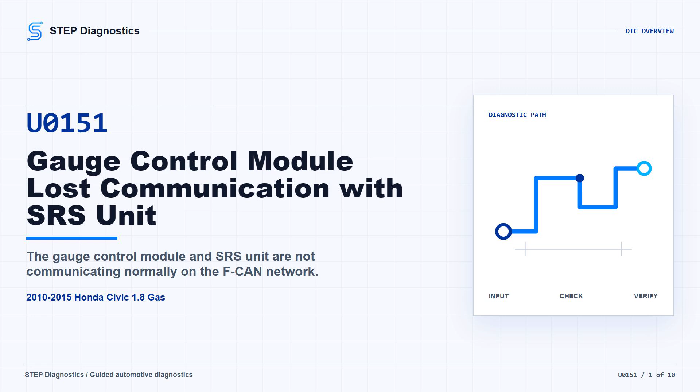On this 2010 to 2015 Honda Civic with the 1.8 gas engine, U0151 means the gauge control module has lost communication with the SRS unit on the FCAN side. In plain terms, the cluster and the airbag control unit may not be talking the way they should.

The vehicle may show warning indicators, communication-related scan tool behavior, or an intermittent concern. The broad possible fault areas are the FCAN wiring between the two modules, loose or poor connector contact, or the gauge control module side of the circuit.

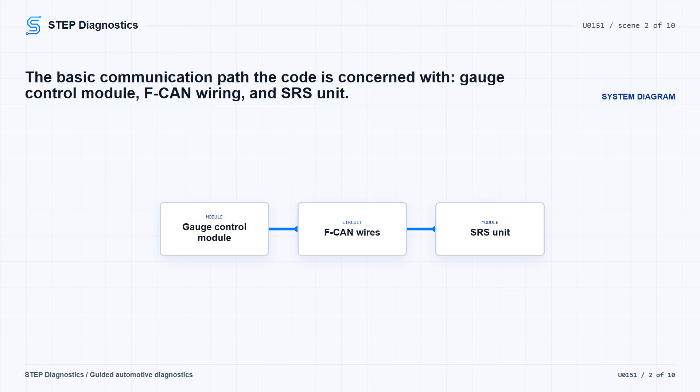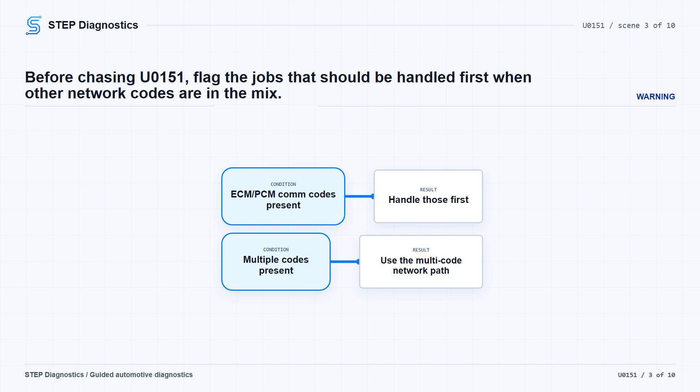Before you focus on U0151, if there are any loss of communication codes for the ECM or PCM, handle those first. And if you are dealing with multiple codes at the same time, work through the multiple code network diagnosis before narrowing this one down.

Start by verifying that U0151 is active after a clean reset. Clear the DTCs with the HDS. Turn the ignition switch to lock, position 0, and then back to on, position II. Wait for at least 6 seconds, then check for DTCs again with the HDS.

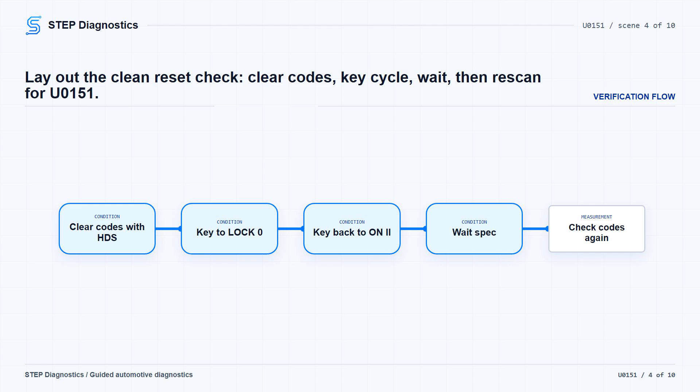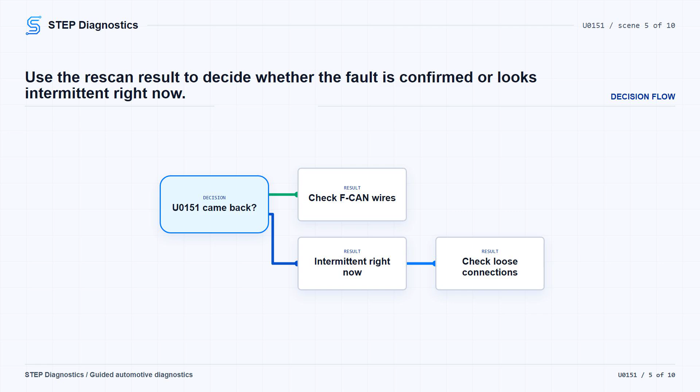If U0151 comes back, continue to the FCAN wire check. If U0151 does not come back, treat it as an intermittent failure. The system is okay at this time, so check for loose or poor connections instead of forcing a hard fault diagnosis. With the code confirmed, turn the ignition switch back to lock, position 0.

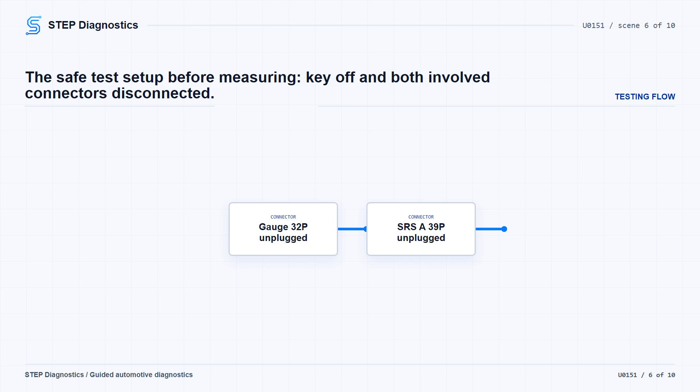Disconnect the gauge control module, tach, 32P connector, and disconnect SRS unit connector A, the 39P connector. Now check continuity on the two FCAN circuits between those connectors.

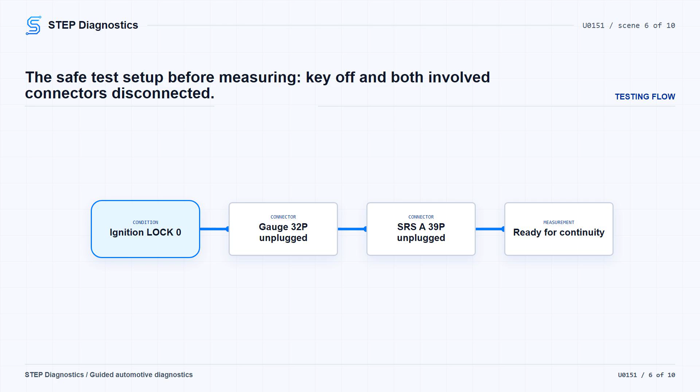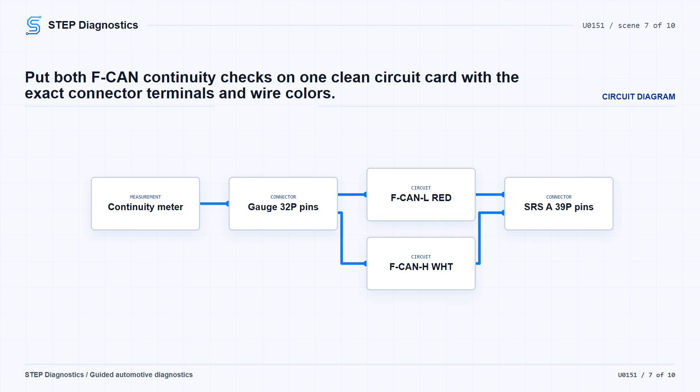For FCAN H, check from gauge control module 32P connector terminal No. 19, white wire, to SRS unit connector A 39P terminal No. 20, white wire. For FCAN L, check from gauge control module 32P connector terminal No. 20, red wire, to SRS unit connector A 39P terminal No. 21, red wire. Use the continuity result to split the diagnosis.

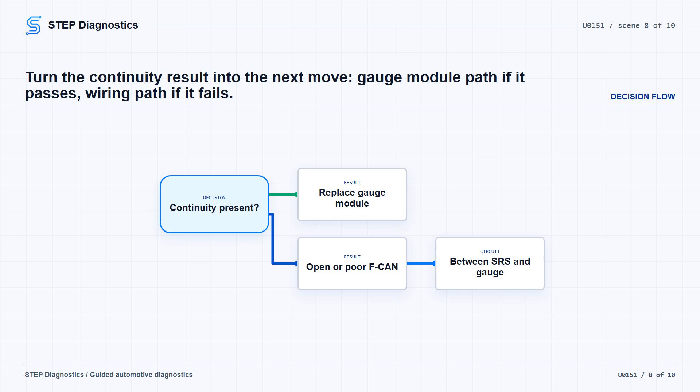If there is continuity on the FCAN wire check, the diagnostic path points to replacing the gauge control module, tach. If there is not continuity, the fault is an open or poor connection in the FCAN wires between the SRS unit and the gauge control module, tach. Stay with that result and correct the wiring or connection issue before moving on.

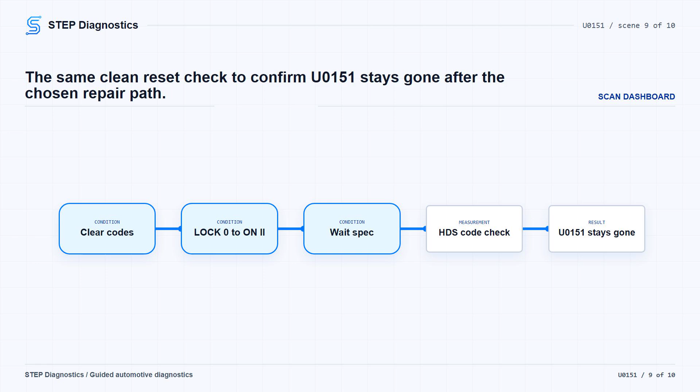After the repair path is completed, keep verification separate from the circuit testing. Clear the DTCs, cycle the ignition from lock, position 0, back to on, position II, wait for at least 6 seconds, and check again with the HDS to confirm U0151 stays gone.

The takeaway is simple. Prove the code first. Check the two FCAN wires between the cluster and SRS unit, and let the continuity result decide whether you are chasing wiring or the gauge control module.